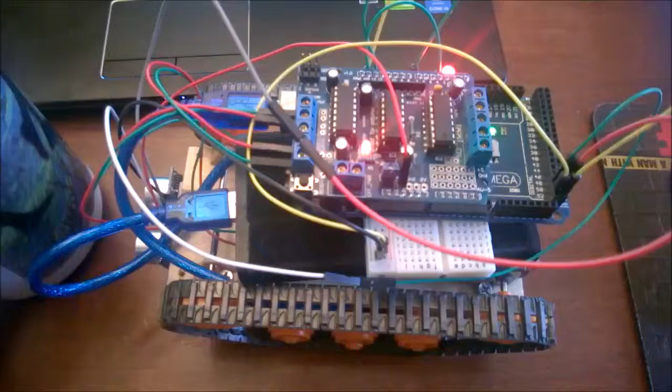Okay, so here is my alpha robot that I'm working on. It is running off an Arduino Mega with the Adafruit motor shield on top.

As you can see, it's just stacked on top of a breadboard. It's just cobbled together at this point. And it is being powered currently by this...

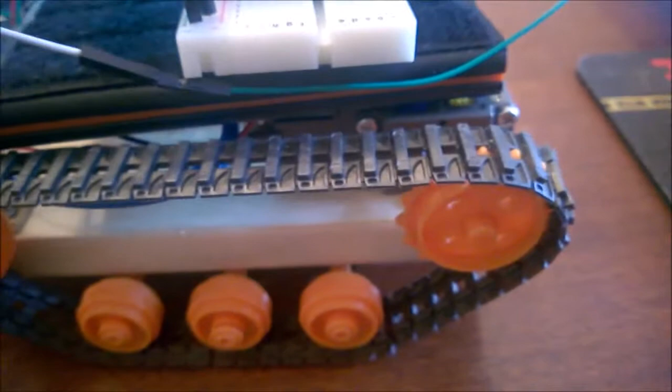battery pack that you can use to power your phone, or definitely these little microcontrollers, as well as Raspberry Pi and things like that. And I'm using the Tamiya chassis here. It's the wheels and the gearing, as well as the double gearbox that you can see down here.

The motors that I have in there are actually from Adafruit, because the motors that come with the gearbox from Tamiya are not rated. The voltage is not good enough for them to be run here. This wants something better than a 3-volt motor, so I've put in those from Adafruit.

And at the very front here on my Alpha, I have an ultrasonic sensor that is allowing it to know whether or not it can go or has to stop.

There's enough slots on this Mega, which is why I'm using the Mega, because my code actually will look left, right, forward, and backward, so that this robot can actually navigate itself around a room and not get stuck unless it goes down into something or climbs over something that prevents it from being able to back up out of it.

And that's the little screaming light there that says, hey, I can't go anymore, because at this point there's no sensors on there except the forward sensor. So this robot, he can't go anywhere.

But if I were to move this coffee cup, this robot will start moving forward until he runs into those D&D books right there, and he will stop.

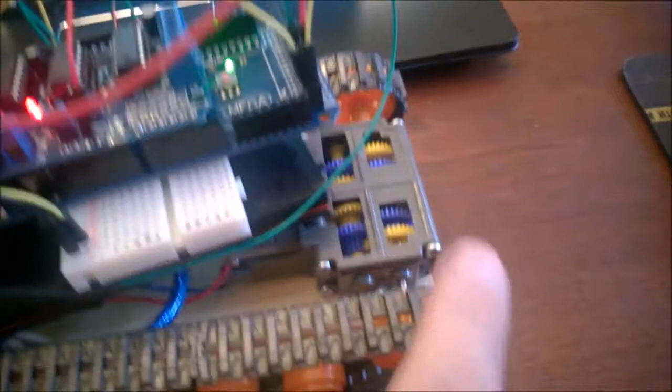But you can see where the issue is, I think, on this Alpha, is that it is very, very slow. And it is very, very slow crawling because this dual gearbox here from Tamiya can be set to different gear ratios.

And I thought, well, it should probably be powerful enough—I'm going to unplug this here—powerful enough to climb over something. And I didn't think I needed a lot of speed, but it turns out that more speed would be nice.

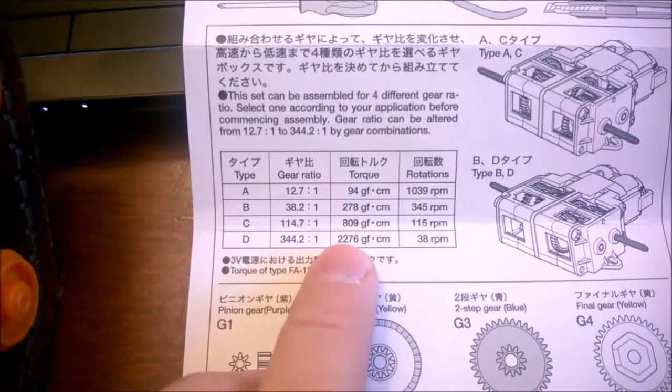So what's fantastic about this little toy kit that comes from Tamiya, when you buy the double gearbox, is it actually comes with gearing ratios for 4 different ratio and torque combinations here. So I went with this one here, the C, which is 114.7 to 1.

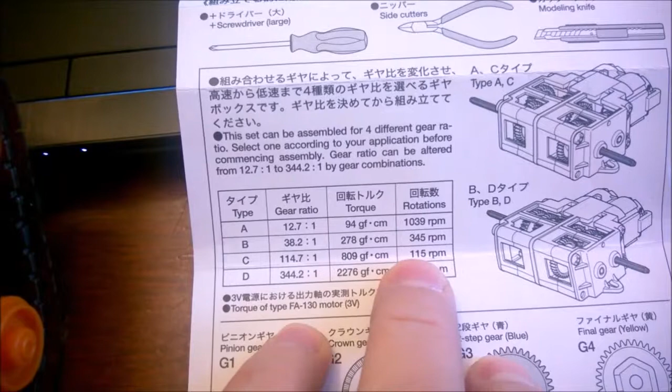That's the gearing ratio, which gives me 809 gram-force centimeter of torque, and 115 RPM. They call them rotations, but it's revolutions per minute, of course, same thing, right?

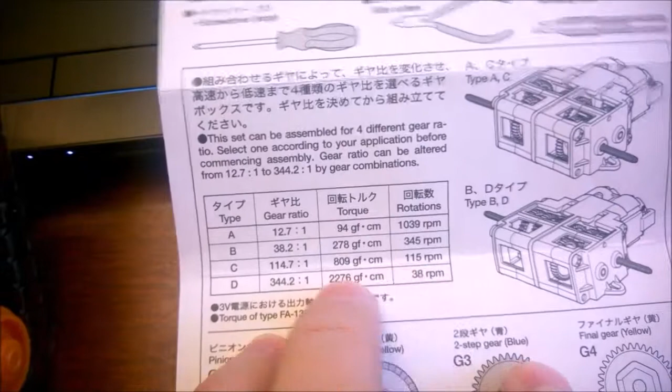I thought that would be enough, but 115 is awfully slow. So I think I'm going to go ahead and move up to this B gearing. It still gives me a little bit of torque, much less than half, right? Almost a third torque, but it gives me three times RPM faster, so I'm going to go ahead and try that out.

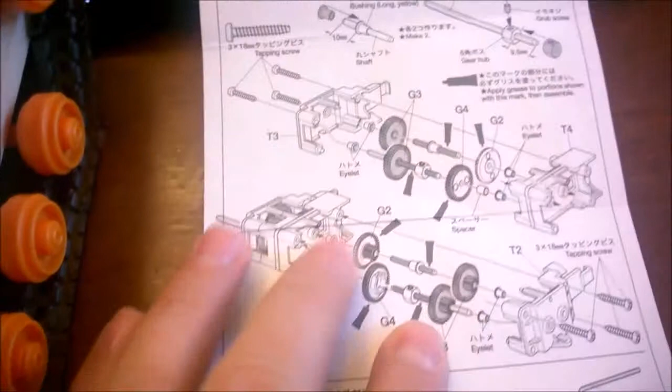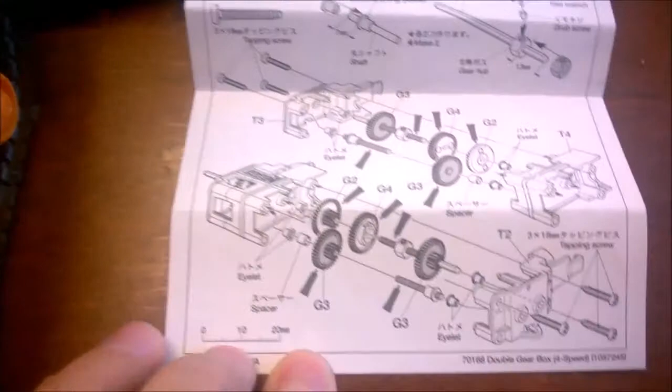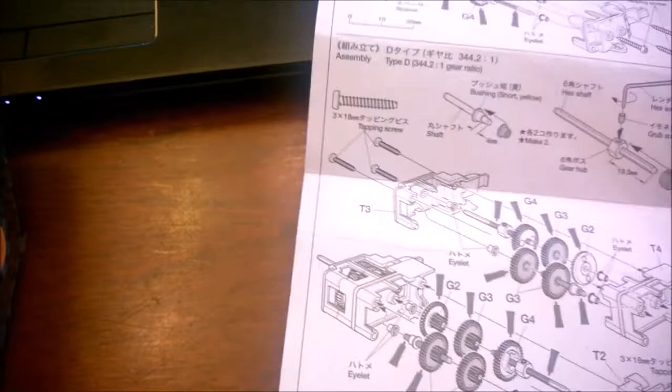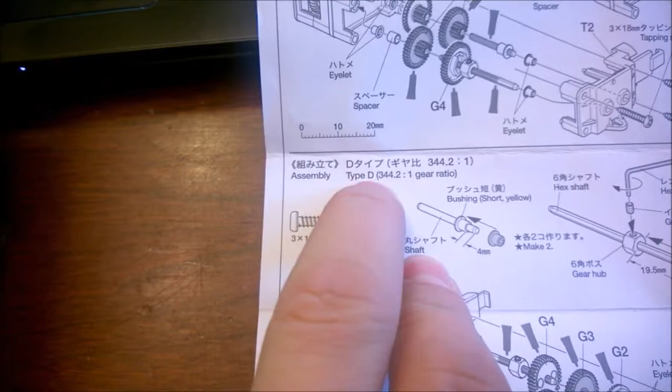It's quite easy to follow these instructions if you have not tried out the Tamiya gearboxes before. So this would be A, and the second one on this sheet is B. On the back side, there is obviously C and D, and you can decipher that even if you can't read whatever language this is that I can't read, because right there's a little D. See that? And then it all says type D in English, all nice and friendly for you.

So let's go ahead and get to that. We're going to use this one here. This is the B. So we're going to try to drop it down to that. All right, here we go.

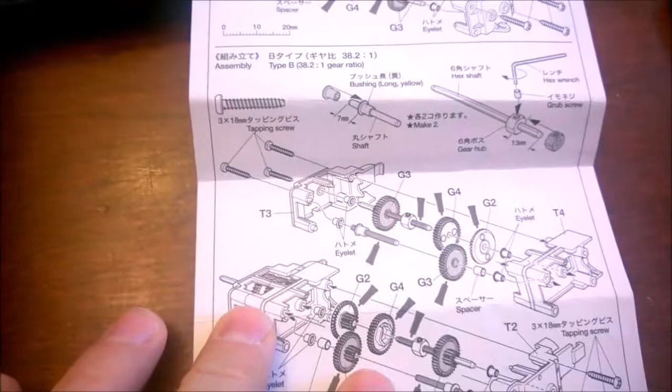All right, so here is the stripped down version of the little robot that I have. I just grabbed a piece of wood and put these wheels on there, because when you buy the actual toy kit that this thing comes with, it's got a plate that this builds on.

And also, if you know anything about them, you can tell that this is from the universal plate kit, not from the kit that comes with it. The kit that comes with it, everything is gray like this. In the universal kit, everything is this putty color.

But even the universal kit is not wide enough for their double gearbox. So that is a little bit of a problem, and I should have looked that up when I did that.

So if you're looking to use the Tamiya kit for your chassis, realize that if you go with the double gearbox, which you really need to do if you want to be able to turn this thing, because a single gearbox, of course, is just a single motor that can either turn forward or backwards, so your robot can go forward or backwards, and that's it.

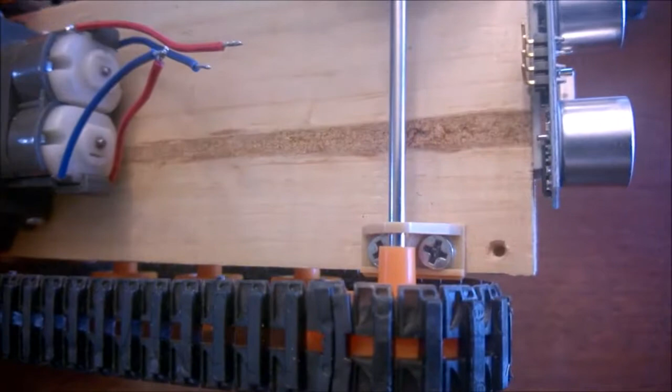Not very exciting, and doesn't add a lot of intelligence to your robot. You're going to have to build your own chassis, or find some online that are made. This one is made a little poorly by myself, hastily thrown together. Just cut off a piece of wood, and I even messed up drilling the holes. If you look closely, it's a little cockeyed, so when this robot runs, he lists a bit to the right because one of the tensions is more than the other. That's something I'll fix as I go forward.

This is an alpha version of this robot, basically to make sure I can run these Adafruit engines, motors, from the code going through the shield. So we're going to disassemble this, and I'm going to take this piece off so we can get in there and change the gearing.

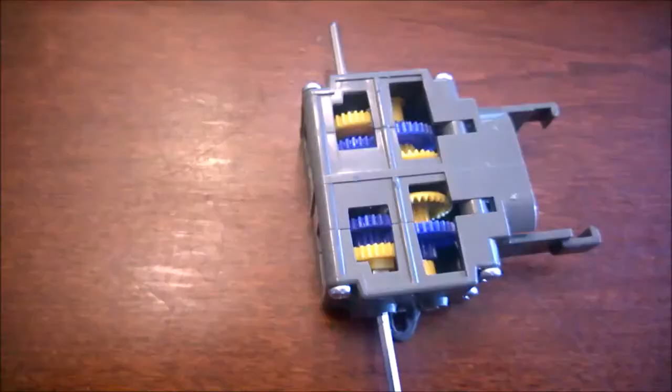All right, so here we have the double gearbox removed from the chassis, and the motors taken out of where they go in.

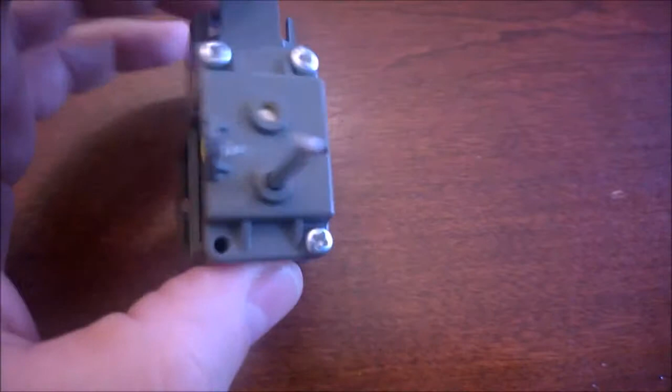It's very easy to build this thing. When you get it, it's completely disassembled, actually like a model kit. You have to cut these plastic pieces out of a mold frame, and if you're like me, you want to cut down the little burrs that show up. Doesn't take very long to get it apart, and doesn't take very long to get it back together.

So I'm going to go ahead and take these screws out, and then we'll have these individual gearboxes open here.

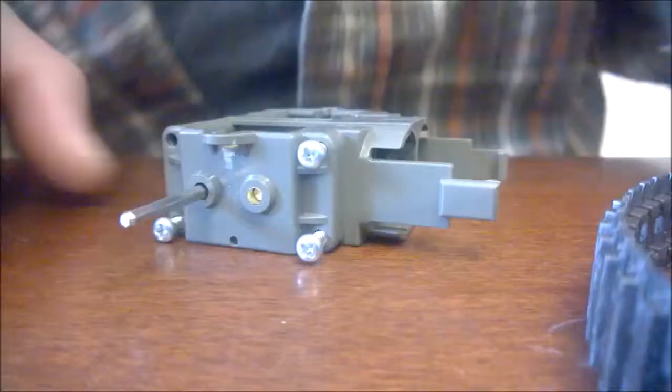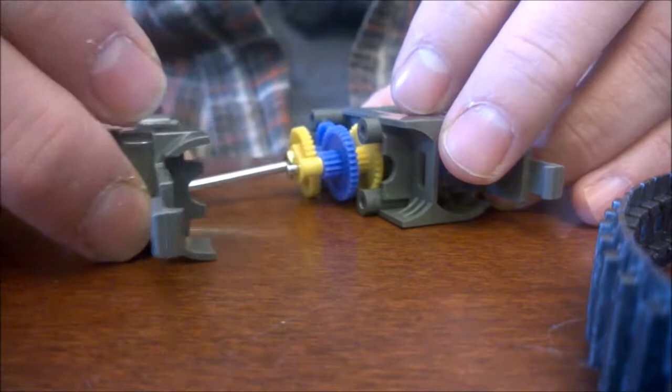All right, I thought it might be interesting to actually see it come apart. So I've backed these screws out here, and I'll just put them over here, like that, and the third one. And then this casing will slide right off like that, and I'm going to turn it like this because there's some bushings in there that I don't really want to fall out. I don't want to be chasing those everywhere.

This gearbox is kind of cool to work on because, as you can see, half of it's still put together. So I can remove the gearing on this side and not affect the gearing on the opposite side. And there's one of the spacers that has come out. I'm going to put that over here so I don't lose it. And you can see the bushings that are in this half of the gearing.

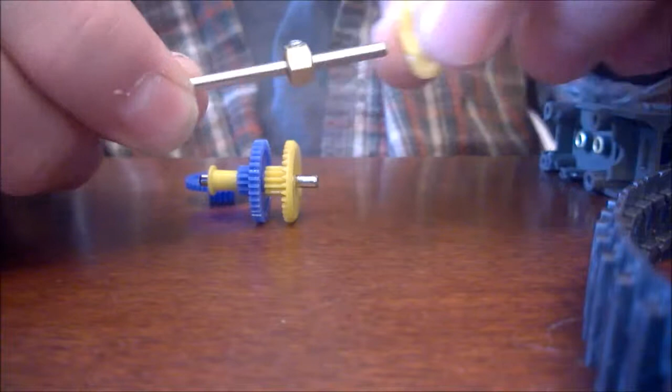All right, so for each of the gearing ratios that are on the paper, there is a gear nut here with a little grub screw in it that needs to be a certain distance from the end of this shaft, depending on how many gears it's expecting to have on the short end. In this case, in the original one, there were two gears: the drive gear here that actually grabs the nut, and then the second gear here that fits into the other gears like this.

These are the gears that get powered from the motor, and these are the ones that turn based off that power. The yellow one turns this blue one, this blue one turns this blue one, and then that blue one turns this yellow one. That's how you get your ratios, right?

Well, for the B, the 38.2 to 1 ratio, it's not going to use the same type of gearing—it doesn't need to go this way. So this locking nut, this drive nut, needs to be moved a little bit. Right now I think it's 16 millimeters; it needs to be moved back to 13 millimeters. So I'm going to go ahead and do that, and then we will continue building this gear.

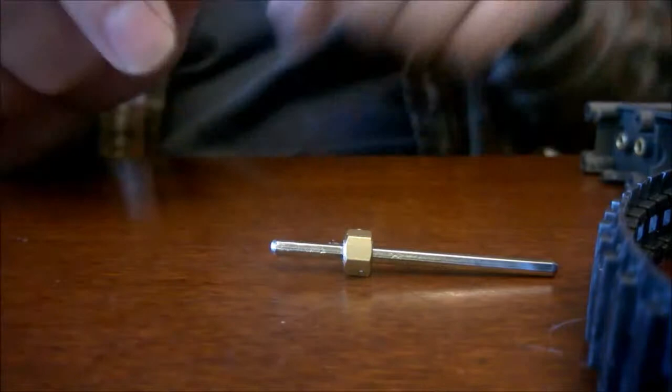All right, so I have adjusted this drive nut here to be 13 millimeters as opposed to 16. And so I can now, following the instructions, assemble this piece.

So I know that the drive gear there is going to be connected to that—I know that offhand without even needing to look at the instructions. But then from there, I have to look at the instructions. So we have one of these gears with the teeth going in right there, and then we're going to have one of the blue gears on this end.

And then on the shaft here that goes in the back, in this case, we are going to have a single gear on that.

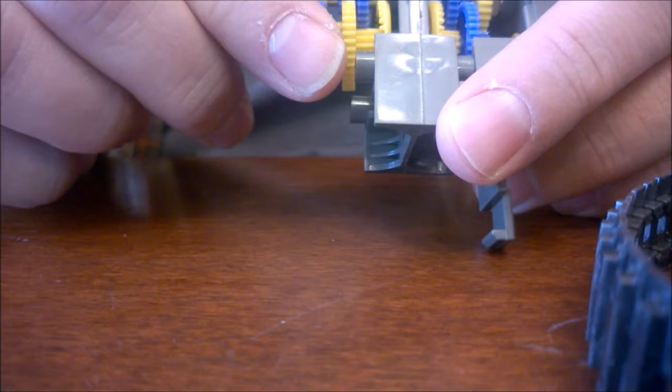And we're going to put our little spacer back on that, and then it's going to fit in here. This can be kind of tricky if you haven't done this before. It has to fit between the gears like so. You have to put them in like that, not expect that you can put one in and then just shove the other one on top. Then I just slide this gear case back together, and there we have it.

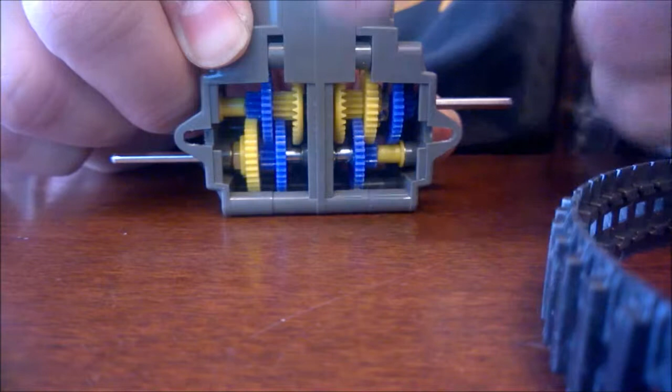So you can see, whoops, should have screwed them. So there we have it. You can see the two different gearings. So this one is now at the faster RPM, at the 38.2, and we're going to go ahead and do the other one here in a second, and then we'll have them both ready to try out.

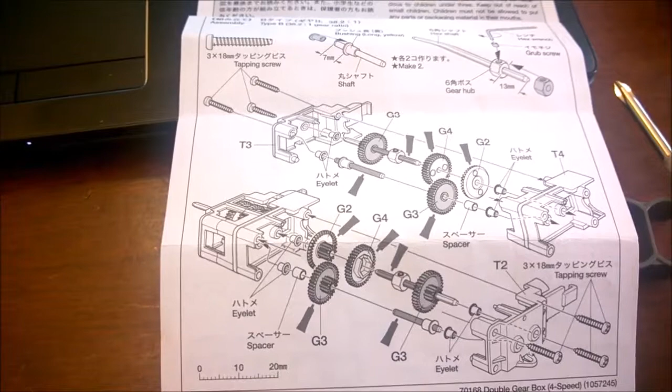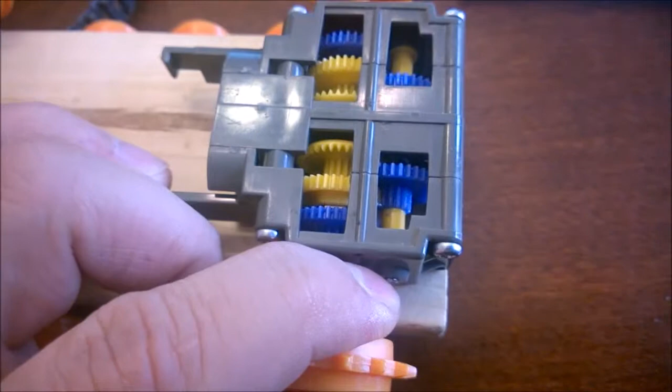All right, so here it is regeared so that the ratio is quite a bit less than what it was. But here's something I didn't really anticipate, because I didn't really pay attention to this before I decided to regear. What you will note here is that there are two areas in this gearbox where a shaft can come through. Previously, the shaft was coming through this rear one, and now it is coming through the front one.

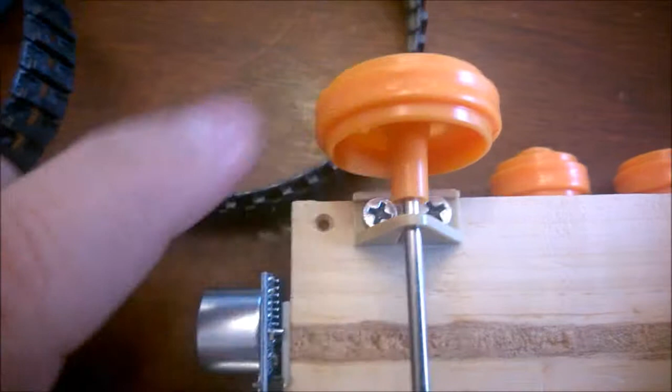So that means that if I were to put my treads on, they will not work. The treads are too long for the wheels. However, I do believe that when I initially made this, I made a similar faux pas right here, whereby it was too tight and I couldn't get the treads on. So by screwing up originally, it's actually going to work out for me.

So I'm going to remove these wheels, unscrew these retainers here, move them forward, and I think that's going to be pretty perfect. All right, so there are the treads back on it.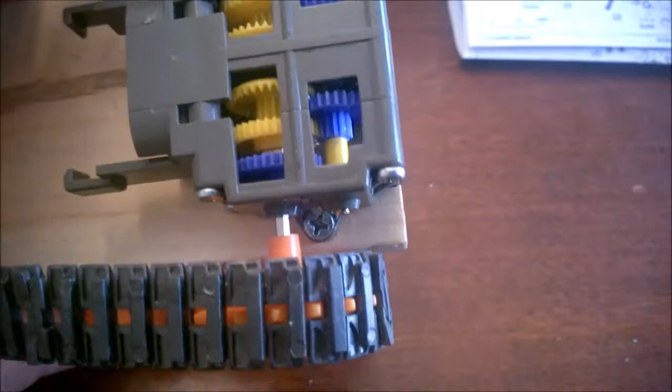There still is a little bit less tension on this one than there is on this one, so either this cockeyed hole that I made in the front is causing that, or I didn't do a very good job measuring in the back here, and this side may be closer than this side, but it's going to work. It is definitely going to work.

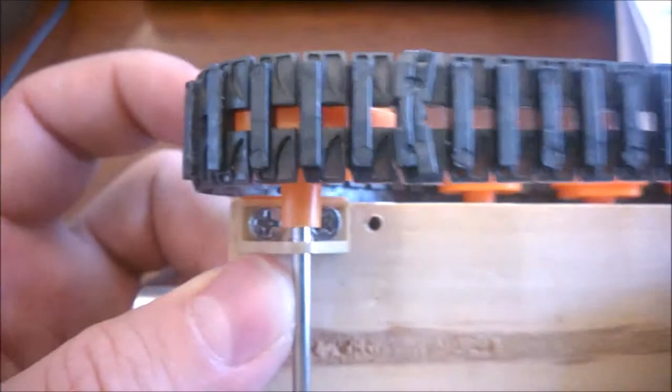The teeth are grabbing the tread, which is the all-important movement piece, and it's tight enough on here that it's not going to fall off. So I think that's good. I'm going to go ahead and hook these back up, put my motors in, and we're going to give it another test.

All right, and here we are, reassembled, as it were, hastily thrown together, prone to breakage. But we've regeared it. It's all back together, and I'm going to go ahead and move the coffee cup, and we're going to see.

It definitely made the trip in a shorter amount of time, which for the robot that I'm making, I think is a decent speed. If I find that as I put stuff on it that it's too much load for it, then we may have to modify that some.

It also might behoove me to connect an external power supply here. This is a power on this shield, which will supply power to the motors without using the 5-volt coming from the Arduino, which might also increase the consistency of the speed. But at this point, I think it's good.